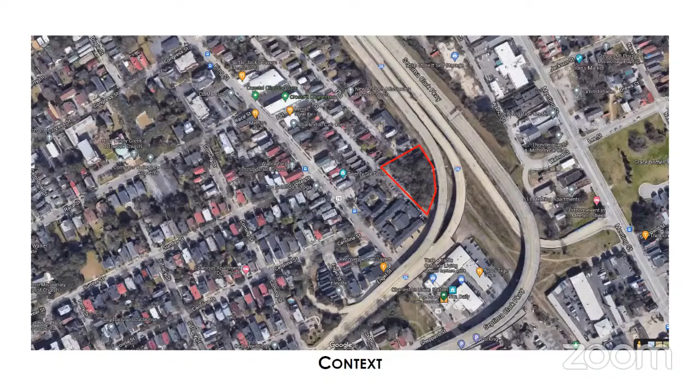Good afternoon. My name is Brian Fessler with McMillan Pazdan Smith Architecture. Also have Robinson Villa here with NEG. He is the developer of the project as well. So we presented this project about a month ago to the board, and we received some comments that we feel like we've addressed, and we're going to kind of walk through those. I think it'll take a little bit more time than normal. I could request a 5-minute extension. Sure, 15 minutes total.

So the primary comments we got last time related to the appropriateness of the building, the character, the sameness of some of the other similar buildings, and most prominently was the relationship of the cornice as it's visible from the elevated height. So those are the things we're going to primarily focus in on today, since I think this board has seen the project before. But if there's questions on any other items, we can certainly answer them.

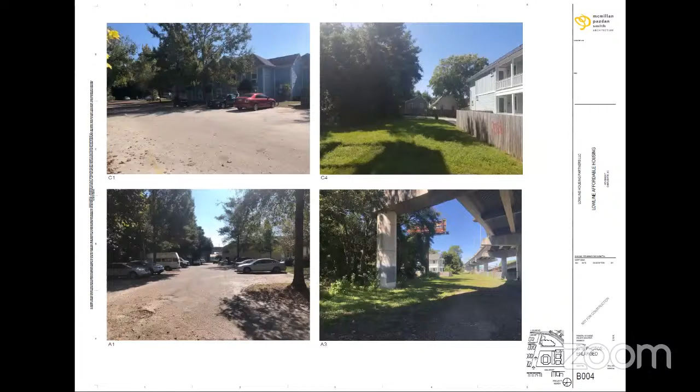So next, please. I want to fast forward through some of these early site plan photos and just move to the site plan quickly. So as a reminder, it's 100% affordable housing. It's a mix of 1-bedroom, 2-bedroom, 3-bedroom studio apartments behind the housing authority's property, but there are a few improvements on the housing authority's property as well as in the DOT property under the fence. In that area, we presented our design intent, but understand that property is primarily under a DRC. But we certainly welcome the comments this board has. Next, please.

Back up one more quick one. So, recent buildings that are relatively close by to this project in the city of Charleston are presented on this page here. They're comparable in terms of their height. They're all about 5 stories, similar to this building. The reason we bring these up is there were comments at the last meeting about our building having a similar effect or similar design to some of these, and that our site and our particular building needs to be more prominent, as some of the board members have said, that they view this site as a gateway to the city.

So with that, these buildings are all fine buildings. Ours, I think, in some ways, is a little bit more interesting in the fact that we really break down the massing a little bit more in terms of planes, and that's a revision from the last time, a little bit more planar on some of the brick components. And then also, these buildings are primarily viewed as one mass. There's some trickery involved with the upper story, cornices, caps, things like that. But I think our building's a little bit different in the massing.

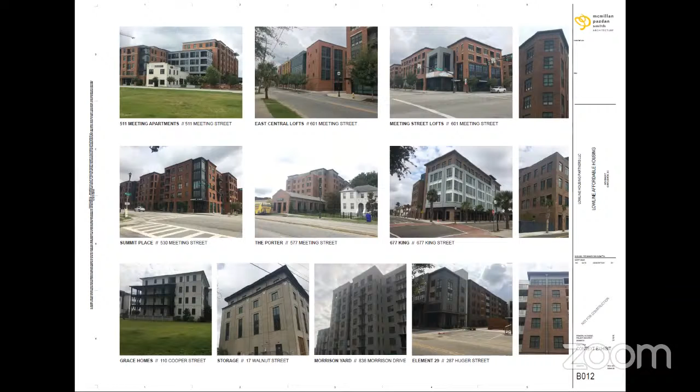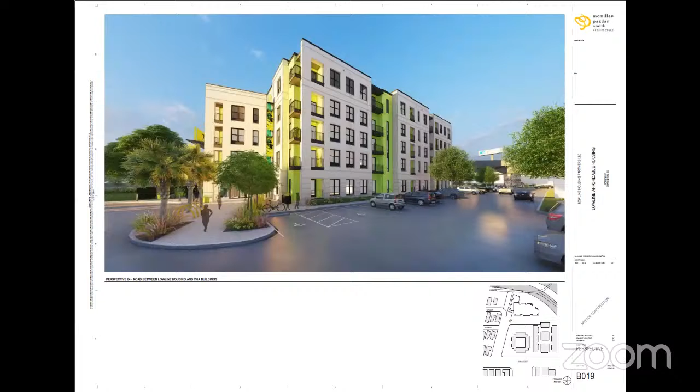View of the ground. We made a good effort to really engage the public at the ground, atypical from your normal apartment buildings. Everyone at the ground level has a porch to enter. Next, please. View from the courtyard area. You can see a little bit a glimpse of the street art. Next, please. Another view from the Low Line. Next, please. Another view from the Low Line.

So one of the other comments we got at the previous board meeting was that our design for our building kind of bled into the branding of how the Low Line park system is being developed. This time we're showing a clear intent that they're supposed to be complementary, but they're going to be different color palettes, different styles, so that the Low Line park has its own identity that's complemented by our project. Next, please. View of the entry. Next, please. Another approach view. Next, please. You can see the Low Line park system entry columns with our building in the background.

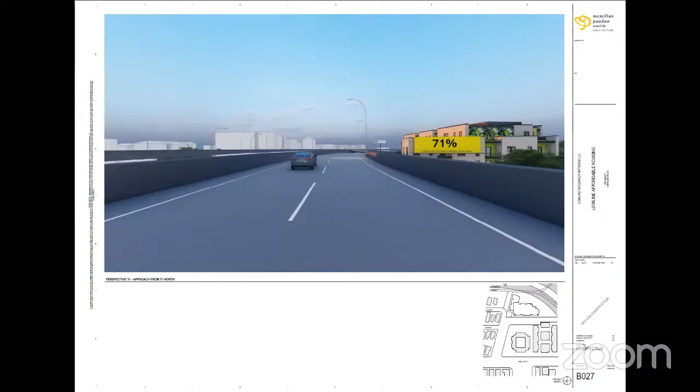Next, please. All right. So the primary discussion last time was how this building will read. The general impression of the comments we received was that it was favorable at the ground level. At the upper level, there was more concern. So that's where we're focusing. So this view here represents the first view you will see of this project as you enter the city. A good portion of it is obscured by a billboard that kind of commands your attention, and then the distant view of what's built now in Charleston, and there will be additional buildings built directly ahead of you as well.

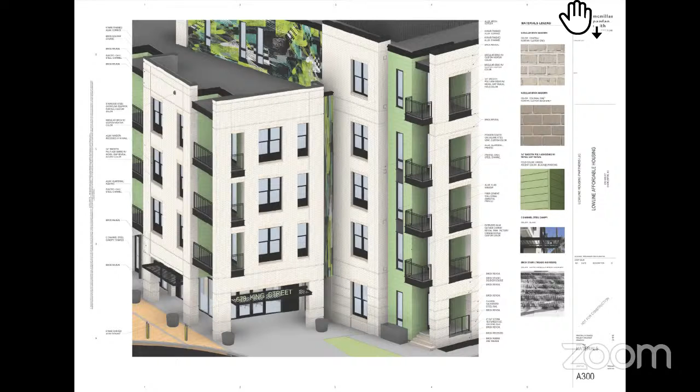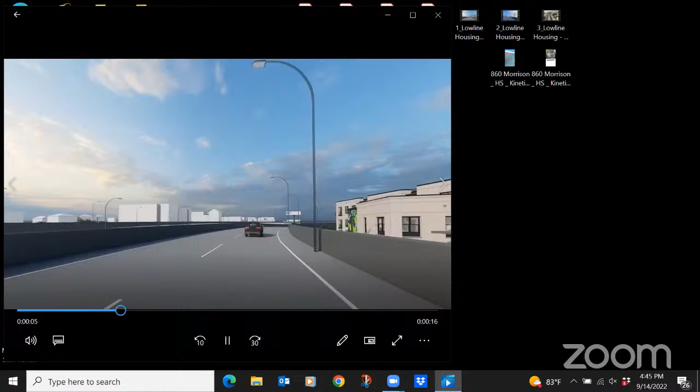So there'll be three animations. One is approaching the city, one is leaving the city, and one is more of flying above the road, which I know the board typically only wants to experience what you see at the ground, but to truly appreciate what the building looks like, the roadway, in my opinion, doesn't give you an accurate picture of this project. So this is approaching the city. Buildings on the right. Downtown's straight ahead.

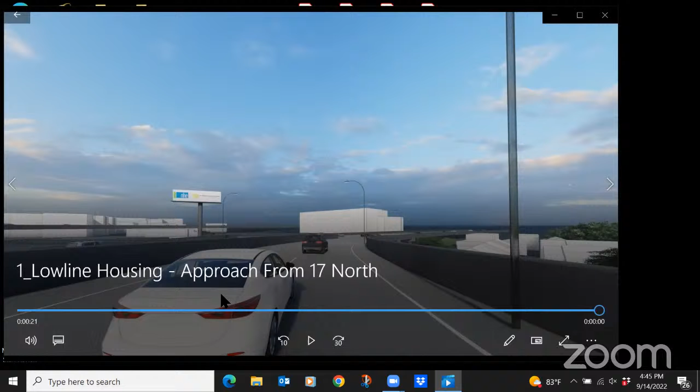I'll explain also the brick we're proposing, and the siding panels and colors are also down here. The primary field is the more rustic brick, and then the smoother one is only for the steps and brick sills. This is the view as you're heading north next to Charleston. The building is on the left.

And the third and final video is an elevated view, which isn't the perception the average person would see, but it makes it very clear to see the areas we've developed as street art, where the brick planes are, those components we talked about, the simplified cornice.

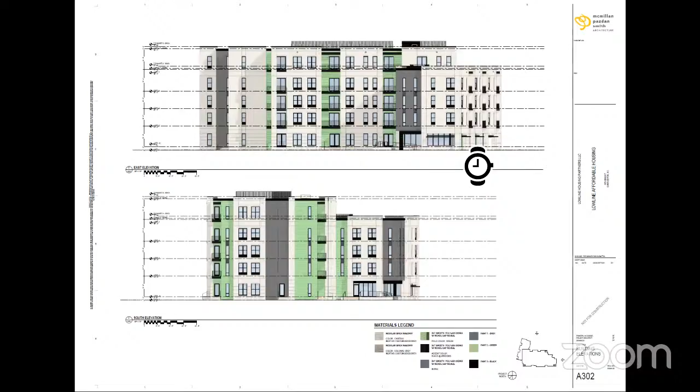Thank you, Ms. Minigan. Further public comment on this agenda item? No, city staff. Oh, sorry. So I always struggle whether I'm the public because I'm city as well. So anyway, good afternoon. I'm Geona Shaw Johnson. I'm the director for the city's Department of Housing and Community Development. Thank you all for your service.

We appreciate all the work that NHE and their team have done to answer the questions and the challenges that you all posed to them relative to the design of this project. We ask your support of it. I recognize that you all don't think about cost, nor do you think about low-income housing tax credits and all that go in to make these deals feasible.

But I would just admonish you to give us a decision of yes tonight so that we can move this forward successfully. We are all aware of the challenges related to affordable housing in our community. This will help answer that question, and we thank you for all that you do. Thank you, Ms. Johnson. Further public comment on this agenda item? Going once? Hearing none. City staff.

Some staff comments. Number one, recent revisions include a lowering of and a simplification of the detailing of the parapets, resolving with something cleaner and more in tune with the overall design language. Related to some prior board perspective of the proposed building as a gateway building, especially from the elevated highway, the project will certainly occupy a unique location.

However, the newly provided perspectives indicate the building to be more of a peripheral building. In this position, the many planes, edges, steps, and interactions on the proposed will provide a frontage that is both interesting and respectful of this unique location. Two brick colors are proposed with elements such as the window sills and headers utilizing the darker brick. I think I've got that right. Staff is neutral with no concern on either color, but not overly supportive of two brick colors for the building.

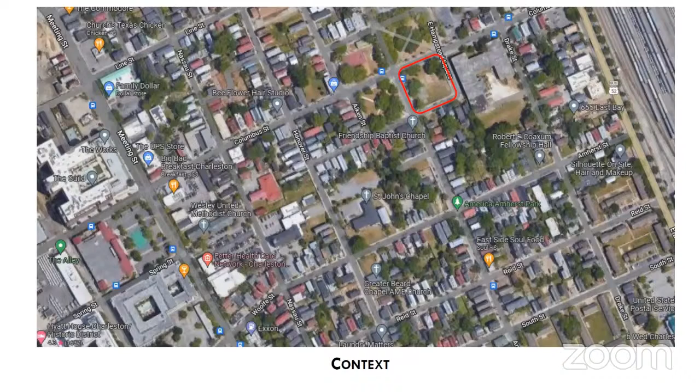All right, agenda item number 3 is Hampstead Mall Southeast Park renovation. This one is on the east side neighborhood in the Old City District, requesting conceptual approval for the renovation of an existing park to include an outdoor classroom with landscaping, hardscape improvements, and the installation of new perimeter fence and pedestrian gates. We have some context slides showing you the location via an aerial. Existing, there is a chain link fence on the property.

We'll have the applicant go. Thanks.

Good evening, Board. I'm Jeff Borowy, the Chief Operating Officer for Charleston County School District. I'd like to open by respectfully requesting an additional 2 minutes so we can show you a video. Certainly. With me today is DJ Helms. He is our project manager on this project with Studio Architects, and he's going to actually present the project. I just wanted to present a quick overview.

We do own the property. We have a joint use agreement with the City of Charleston for public use. That was one of the desires that we received during our public meetings. We've had 2 public meetings with the East Side neighborhood, and that would allow public use after school hours. So we would unlock 2 of the gates and allow public to use that. And that would really be beneficial during the holidays of the school breaks.

Our school, Early College High School, has an agreement with Trident Tech. We're on that campus across the street. We use this area for PE, and as mentioned, we will use it for an outdoor classroom. We are going to be building a support facility on the old Wilmot Fraser campus. So essentially, the quad will be between those two buildings. With that, I'd ask DJ to come up here to present our project. If you're done, take us to the next slide, please.

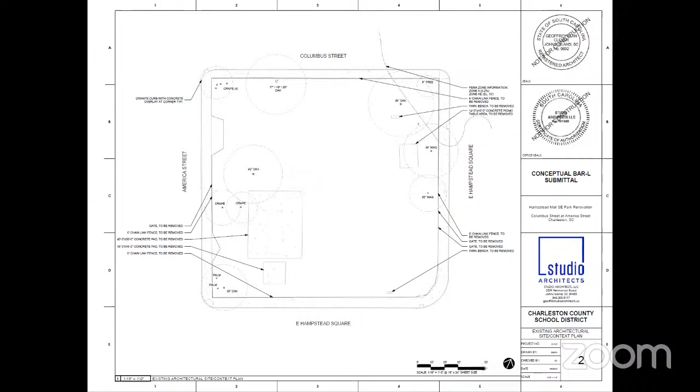Perfect. Okay, so this is the existing site plan. What you can see here is that existing perimeter fence is a chain link fence. We are proposing removing that chain link fence. You'll also see these existing concrete slabs that are located throughout the site. We'll propose removing those as well as the bench seating that's there, or picnic table seating you'll see in some images that we have later on at the site. Next slide, please.

We wanted to give some context to our site and the surrounding quadrants of the park. So we're going to go through northwest and then all the way across to northeast. So this is northwest. What I'd like to call your attention to here is the wrought iron fencing, as well as the low wall along the perimeter, as well as the signage here in the bottom right-hand photo. Next slide, please. This is the northeast quadrant. What we'd like to call your attention to again is that perimeter fence that's a wrought iron fence, as well as that low wall, as well as the brick edging on the concrete walkways. Next slide, please.

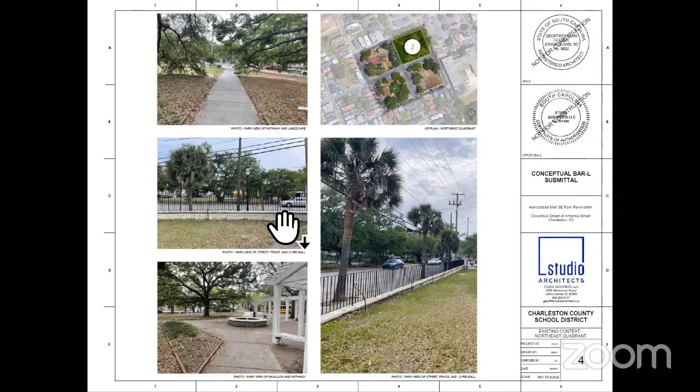Again, here we'd like to call your attention to the brick edging along the walkways, the hardscape and landscape, the trash cans. And this is the southwest quadrant. The next slide, please. It is our site, the southeast quadrant. And what you're going to see here again is those picnic tables and bench seating, as well as that perimeter chain link fence. And you're getting a glimpse of some of the concrete pads that are out there. Next slide, please.

Okay, so this is the proposed architectural site plan. The first thing I'd like to call your attention to is that multi-purpose playing field that's located on the south side of the site, as well as the outdoor classroom. The outdoor classroom would consist of some seat walls that would be brick, and we have some examples of those later on in the project. And then, of course, how those sidewalks organically make their way to the corners to provide access and kind of connect this quadrant of the park to the other quadrants, as well as to the schools across the street and to the corner of the street.

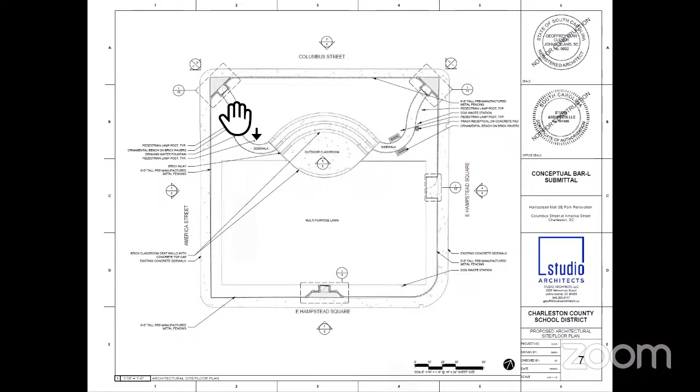We also are providing an entry point at the south side of the site, and we'll show you a little bit larger detail later on what those look like. We'd also like to call your attention to the bench seating, the lighting, and trash cans, dog waste stations, and drinking fountains scattered throughout the walkways. Next slide, please. These are some elevations of the site.

They're just a little difficult to read on the screen now, but what you can see is the relationship of the entryways to the perimeter fence, as well as the lighting inside and that low seat wall at the classroom, and how that all connects together. So we'll show you that in a little bit more detail and where they are throughout the site on the landscape plan in a couple of slides.

Next slide, please. This is an enlarged plan and elevation of one of the entry points. All the entry points pay tribute to what is across the street on the north quadrants of the park, using those cast-in-place concrete piers, which have a facade on them that matches the ones on the north quadrant, stucco and painted to match, and we'll show you that material in another slide going forward. We are proposing using wrought iron fencing in between the piers, and outside the piers a pre-manufactured fence. And all of these again relate to what is already there on the other quadrants, as well as that signage piece that we have as a placard on the entry point.

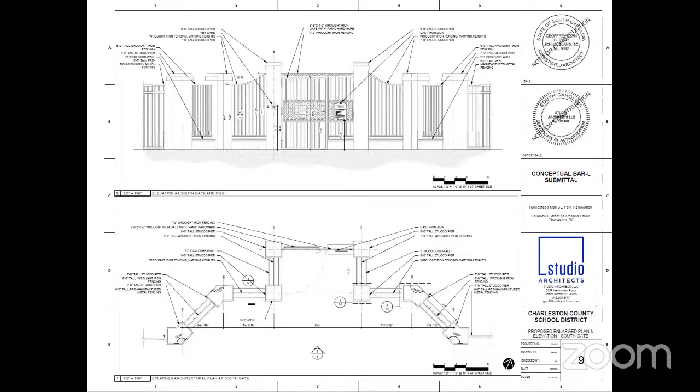Okay, next slide. And again, same thing here. The first one was the northwest side. This is the northeast side, so it is basically a mirror image of what you just saw. And then the next one will be slightly different. So if we could go next slide, please. This is that south entry gate that is slightly different, but still very similar to the other corners. And then next slide.

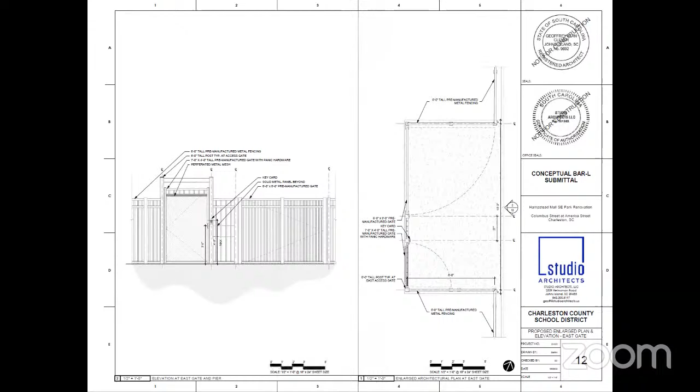This is an access gate. We're proposing using it primarily for the early college across the street, as well as for landscaping, utilizing the larger gate on the right-hand side here for equipment to maintain the lawns. Okay, next slide, please. This is just a little bit more detail of those piers, both in plan and in section, how those would be constructed and how they would be finished. Again, the finish on those, we'll show you in the next slide, would be to match what is across the street with a stucco finish and color to match. So we can go to the next.

So this is a detail of the seat wall at the outdoor classroom. We're proposing a brick finish on that with a concrete top. We'll leave some open spots in that seat wall for drainage. Next slide, please. These are the finishes. Again, that wrought iron black fencing on the inside of the piers, the outside of the piers would be the pre-manufactured fencing, and then the stucco and the color of the stucco.

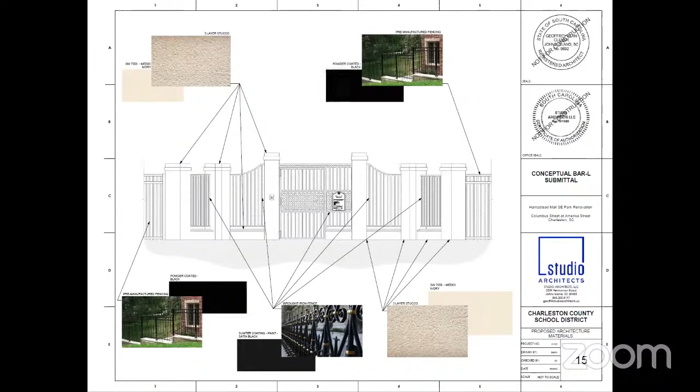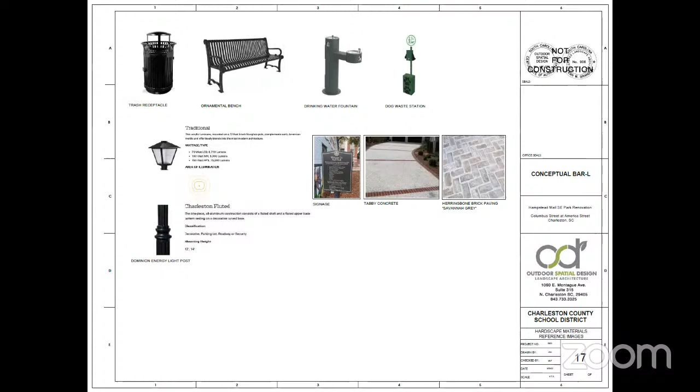The next slide. This is the landscape plan. It shows you a lot more of where that multi-purpose play field is underneath the foliage that exists today, those tree canopies, and how all of the things we've explained on previous slides would work with what is existing today. Next slide, please. And then these are some of the interior components of the park: the brick edging, the signage, the trash cans, water fountain, dog station, lighting, light posts, things of that nature. Next one. And these three slides are some stills of the entry points we just referenced, the stucco piers with the cast iron and perimeter fencing.

Next one. That's the last one. So if we have that video, it would be perfect. Don't have one? Okay, we sent over a link with it. You've done a great job with the presentation. If we don't have it, I don't think it's hurting. Okay, well, thank you so much for your time. Absolutely.

Public comment that's been submitted in advance has been considered and is written in reduced form. Any members of the public care to speak on this agenda item? Hearing none, city staff comments or recommendations. Okay, we have a few comments here.

Number one, staff understands the need to secure this area to be used by the adjacent school for a certain period of time during the day, and that agreements are in place to regulate when the park is open to the public. Two, the zoning division has no issues with the heights and location of the fencing and piers. Three, while curbing consistently around the project would be consistent with the northern quadrants, the fencing is an upgrade from the chain link fencing that exists there now. The pre-manufactured fencing, piers, and curb wall should match the existing at the northern quadrants of the mall as closely as possible. Four, omit the knee wall adjacent to the gate between the two entry piers in order to maintain the symmetry that was created with the piers and fencing at these locations.

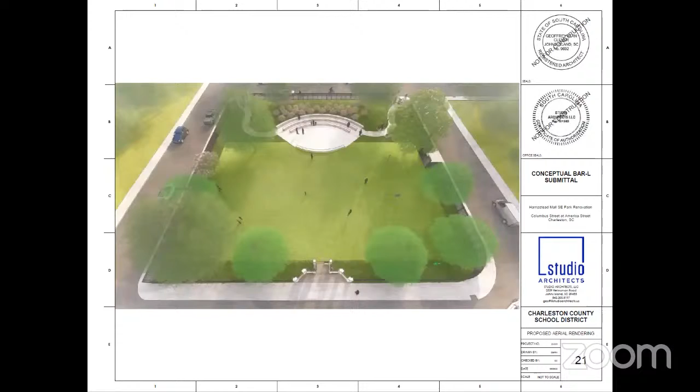Further questions or discussion? My only question is, it is a partnership. I understand that. I am a little concerned that it is fully fenced in. It's not entirely engaging with the neighborhood, and if it is a public park to be used outside of class time, then the public may not necessarily feel comfortable in going in. But that doesn't really relate to the architecture or anything.

What I've also noticed is that there's only 3 entry points. Is that right? There's 4 if you count the access point, and all of the entry access points have emergency egress to meet code. I know that the school district or the city or someone's going to want to use this park, and they're going to want to bring in food trucks or something like that. So I'm thinking about the accessibility of the park generally for a larger event or what have you.

I would just offer that the maintenance gate would allow larger equipment to get into that park, so we could get things in there. The second thing is that we did in our public meetings explain exactly the way it was going to look, and there wasn't any pushback from anybody on that accessibility to get in and out of there. It was a very positive meeting we had in July actually, in which they were excited about the use of the park after hours. So we didn't get any of that negative feedback.

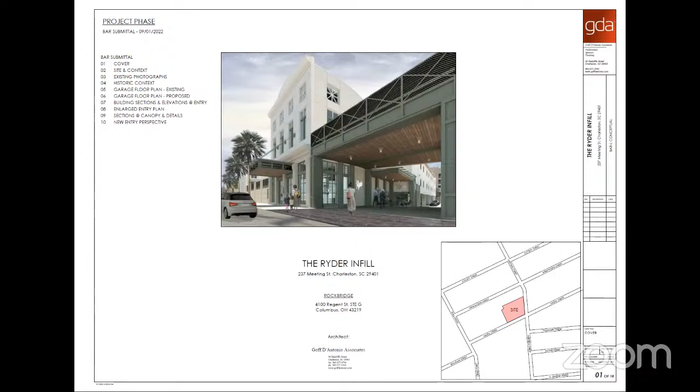So if you could go through the next couple pages here. Yes, the existing photos page, go to the previous ones, please. This just shows you the color palette, the stained wood roof, the light fixtures, the existing overhang down the garage. Next slide, please.

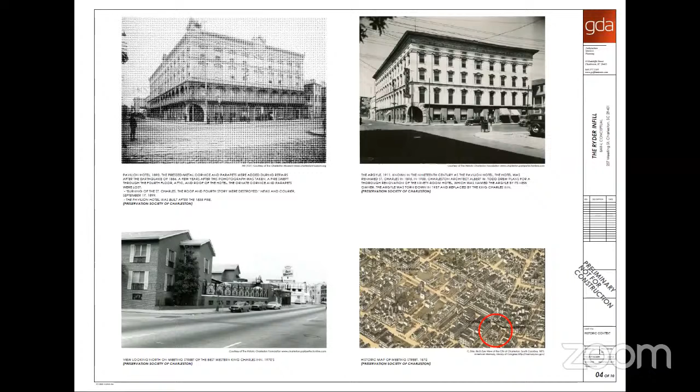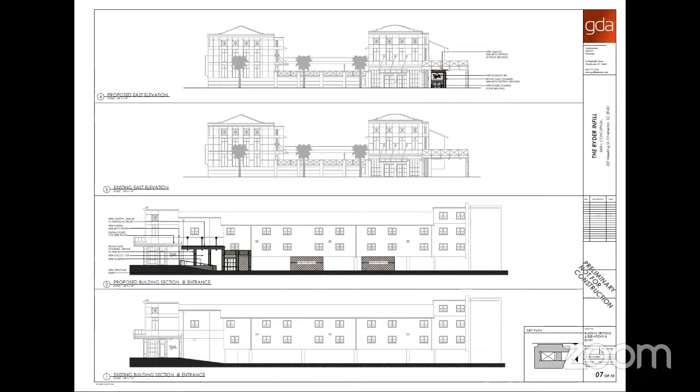This is the elevation sections of the new canopy that we're proposing, and ideally it's going to match the existing canopy on Meeting Street. We want it to be the same feel, same color, same tie-back rods, just good protection as you walk down to that lower level lobby. And then introduce new pilasters to match the existing design with the same color palette. Next slide, please.

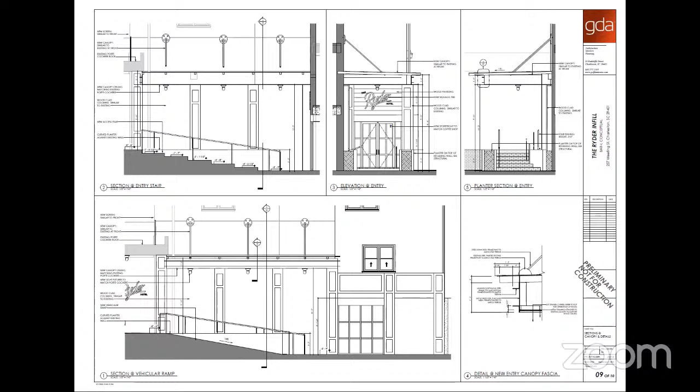Public comment on this agenda item. Take your city staff comments and recommendations. Number one, the project was initially approved with a provision for the green walls without the wire lattice. A sidewalk encroachment easement will be required for these, and they should be irrigated to be successful. Two, applicant is confident that queuing of vehicles caused by valet parking can be worked out with the city's traffic and transportation department, a critical next step.

Zoning division has no issue with what is proposed, and there is no TRC review required due to the small size of the addition. We understand this has been resolved. And three, the new lobby situated behind the porte-cochère and significantly lower than the current entry will have a minimal impact on the street presence of the project. Therefore, the recommendation is final approval with board and staff comments, with final review by staff of the forthcoming drawings. Any response, Mr. Batchelder?

Board comments and a vote on this agenda item. I agree with staff's recommendation. Have a motion? I'll introduce a motion for final approval with board and staff comments and a final review by staff for forthcoming drawings. Thank you. That's straight off the slide, so I'm not going to restate. Is there a second? Second. All right. I'll go down the roll. Mr. Brown, how do you vote? In favor. Mr. Metters? Yea. Ms. Sobel? Mr. White? Yea, in favor. And myself, yea in favor. Thank you to the applicant.

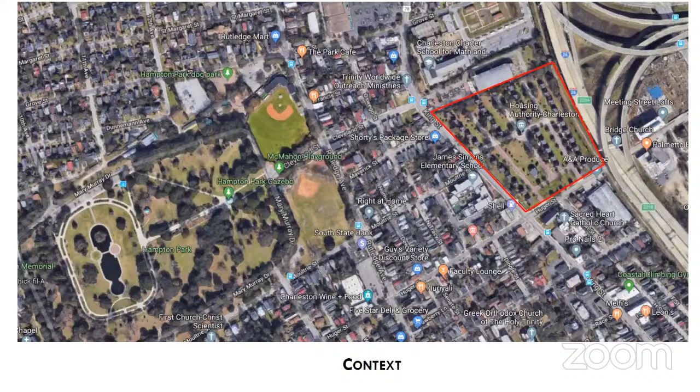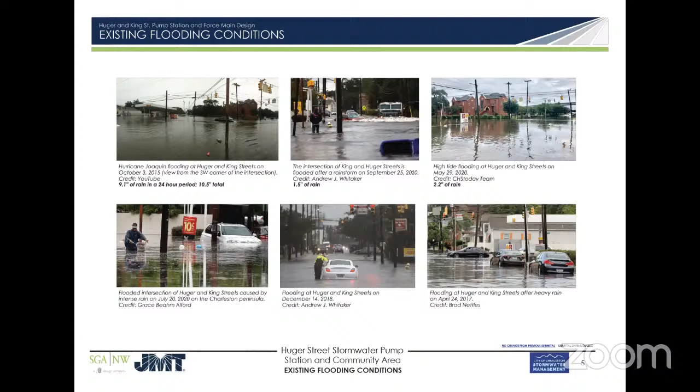We already presented this back in March, I believe, and since then there was a lot of development of engineering, progressing of design, et cetera. I think everybody on the board was present at that conceptual review, so I don't want to concentrate on every single drawing here, but go through some of the comments we had and how we approached resolutions of those. So pretty much the first 15 pages show context, some of our maps, history of the area, the engineering concept for the drainage solution for the area. So we can go through those very quickly.

The next one, I'd like to look at page 15. Number 15. So with that one, on the left-hand side, we looked at the comments from staff and board, and we have the responses to them. Some of the comments were more observations, so they would not even require responses. And for most of them, if you look at the drawings and images, you will see what we have done to reflect solutions to the comments.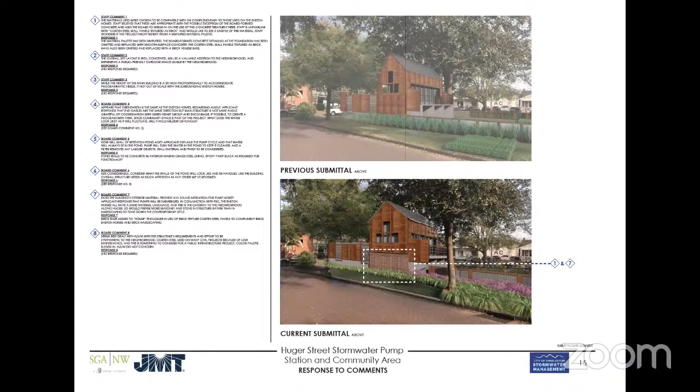So if we look at drawings 16 to 27, the line drawings of floor plans, elevations, 3D images, basically showing what we had presented previously and what we're presenting today with the development of this project. So again, let's go to page 16.

That's a plan, and I will walk you through what has actually changed there. With the developing of engineering, what we call this vertical structure house, actually housing the large electrical parts, which grew in size, also needed some other components like HVAC, condenser, and things like that. So our enclosure has been elongated a little bit, and on this Huger Street side, it basically got a little bit larger on this side, and it's hiding the condensers behind it.

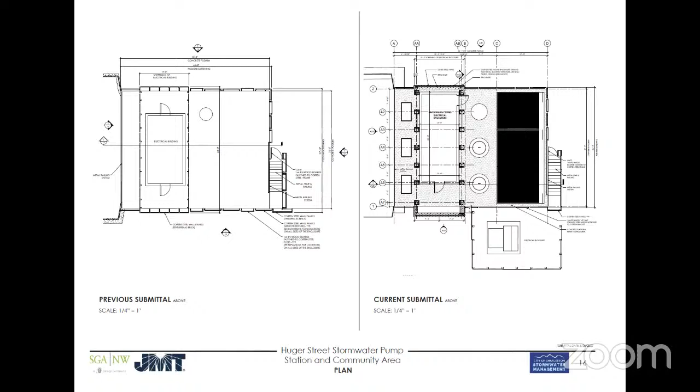Also, we had not had any information about the transformer and its size at that time, a few months ago. So now we know the size, we know where it can be located, and so this new plan shows the enclosure of the transformer, which is really high, taking into account that it has to be elevated and so on as well. So you will see on the elevations this enclosure is actually a continuation and extension of the enclosure of the platform which we proposed earlier. So again, page 18.

So you can see that's a Huger Street elevation. We show the previous rendered image and line drawing elevation, and the current image and line drawing elevation. One of the comments was to see if we can engage more of the brick veneers in this enclosure. So that's what is done now. You can see the base for the tiles is actually raised, and the tall brick, and it has three sides to it. The brick will match the color of the bricks in the existing historic buildings, but also a little bit of the details of projections and step brick and things like that.

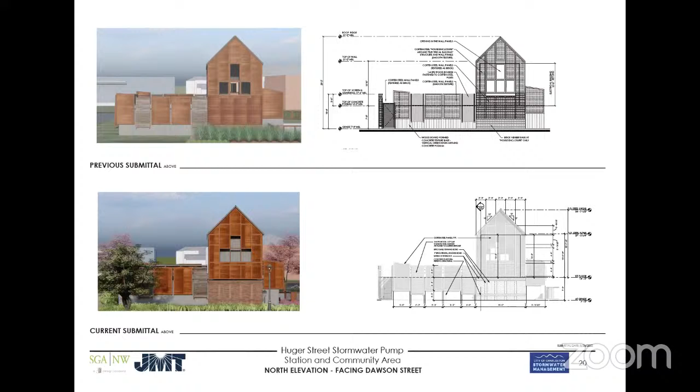So same, page 20, it's on the other side. It's the same issue. Here it's not as projected as much, but we're still engaging more brick at the base. Page 21. Here we were talking about what was the grade and the pond walls and what the color is and how it will be stained or not. Right now, on the renderings, it's still a gray concrete color, but what is proposed is to use the black epoxy paint, and all the walls of the pond will be painted that way.

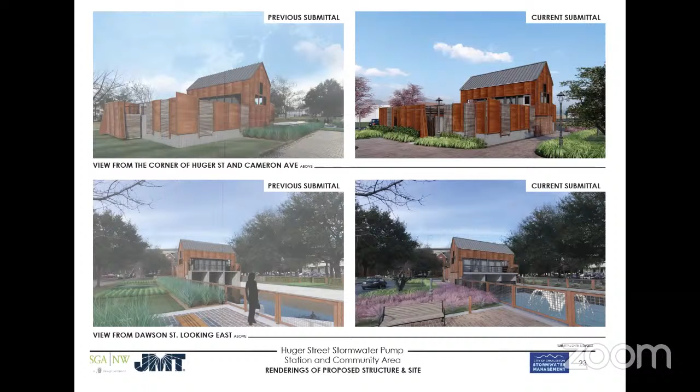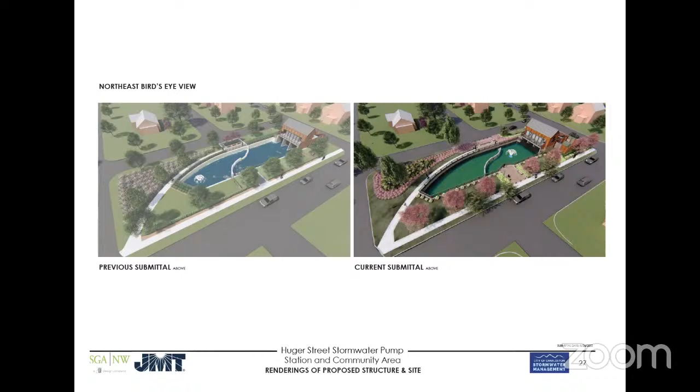And now we go through, trying to speed this up a little bit. Again, sheets 16 through 27, we can go pretty quickly. Again, we're showing on the left-hand side what we presented earlier, on the right-hand side what we developed. If we can keep going to, say, 23. So that's basically a few views of what we're proposing now, the newest views. And 27. Again, those are two comparison aerial images of the overall project, and you can see again the pond increase.

You can see how the landscaping has been developed, and if you go to page 29, it's really showing how picturesque this community area became. A lot of really social landscaping, acceptable forms, accessible areas for people to gather there, and all the landscaping has specifically been worked through with the owners and DRC involvement. So all the species of the planting and trees are shown here accurately, what the colors will be and things like that. So all other renderings actually present this.

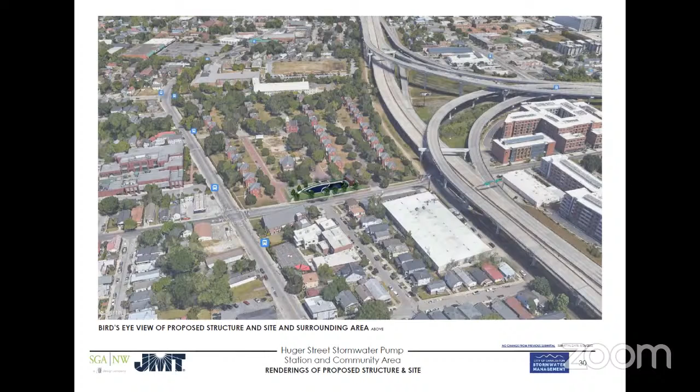And the rest of the pages are pretty much to support where we're coming from for the materials which we've chosen. They contain steel mainly for the enclosure, concrete, but also since we actually applied for final review here, we wanted to include some of the engineering drawings. They're very extensive. There are a lot of drawings, so we just picked a few of them for you to see how this project is developing, but not to review all of them. So at this point, I think that's what I want to say about this project, and we will be open to any questions.

Thank you. Mr. Chairman, can I ask a couple of questions? So you mentioned, and I may have misunderstood, that the brick color of the new construction would be close to matching the brick color on the buildings there. I don't know that that's necessary. The way I look at it, it could be distinctively different, but I appreciate that. Second, this building and its function is basically the same as the building down on Concord Street and the building between the two Ashley River bridges, in terms of its form and function, it's basically the same thing.

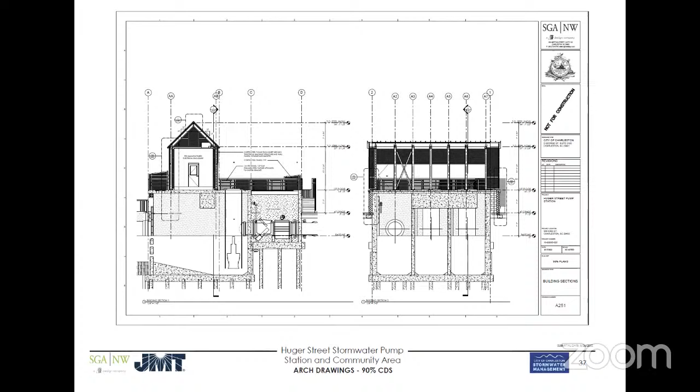We jumped off track. City staff comments or recommendations. I'm sorry, is there any public comment on this item? Oh, yes, sir. Thank you.

My name is James Ward, and I just had a comment based on my role as a teacher at College of Charleston. Given the emphasis put on the aesthetics of this building, I really am blown away by it. I'm really happy about that. But it seems to me that we have an opportunity for public engagement and generating and keeping public support for this kind of massive project if we incorporated more public interpretive signage. I mention that not as a criticism, obviously, but just as a thought.

I've noticed in other cities where they've had this kind of low impact development, or even something as engineered as this, they reached out and tried to tell the public exactly what was happening instead of just making it pretty. I think that helps to engage the public, make them aware of where the money's going, and perhaps keep them committed to the process over a longer period of time. I'm hoping that is helpful. Thank you, Mr. Ward. I appreciate your comments, very thoughtful.

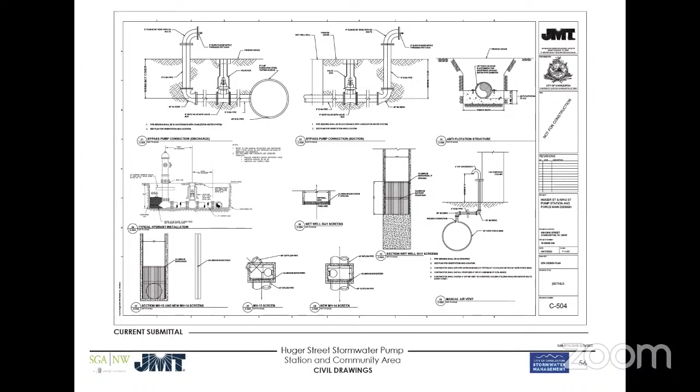Other public comment on this agenda item? City staff comments or recommendations? Number one, this interesting project marries the functions of a much-needed stormwater pump station with a public park. As a reminder from the conceptual review, the project will use different materials in a contemporary approach, while the color palette, scale, and massing of the primary structure will be compatible and sympathetic to the nearby historic Enston homes. Much of the housing for the sizable equipment will be below grade, resulting in a building height approximately the same as that of the Enston homes.

The project has continued to be refined, with revisions including an opening up of the plaza space on Huger Street, which will provide more space to access and use the park. The park area has gone through several iterations, resulting in a comfortable public space around a pond, which staff is assured will retain roughly the same level of water year-round. It is noted that the interior lining of the pond will be painted with black epoxy paint, although this is not reflected on the segments in the middle of the pond.

Staff is appreciative of the applicant's decision to replace the brick texture panels with real brick and to replace the board form concrete with a smooth concrete. We do believe that the exterior concrete should be textured or finished in some manner. And four, noise mitigation has not been addressed outside of confirming the location of the pumps to be underground. The perceived need or lack of need for sound mitigation should be confirmed.

And lighted bollards, which normally are not acceptable, are likely appropriate here due to the public and institutional nature of the project. And last, number 6, applicant to provide photometric information for each type of fixture, as well as site photometric data. We are recommending final approval with board and staff comments with a final review by staff of permit drawings. Any rebuttal or reply from the applicant?

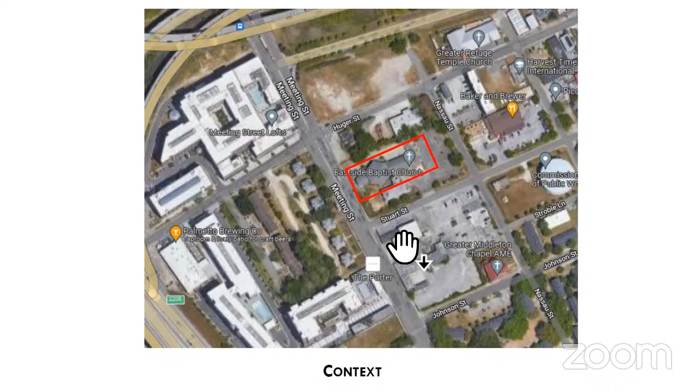We took our time from preliminary to come back to final, because there were some details that Bill will further enumerate that we wanted to get just right, because it's a complex building, but we have experience doing this type of project, and it's developer and architecture intensive supervision. And while it's a complex building, we know how to do it and have the right people to carry it off. So again, it's a privilege to present for final approval. Let me introduce the lead architect of the project, Bill Morrison.

Thank you, Jeffrey. I have a set of drawings here that's way too long and probably too boring. So if I give you the page number, can you go to that? Okay. This is my first time presenting for final, so if I skip over anything, I'm happy to answer any questions. But what I'd like to do is focus on the three principal materials that make up the building. So if you wouldn't mind going to page 28, I'd like to focus on these wall sections, which I think outline how the building comes together.

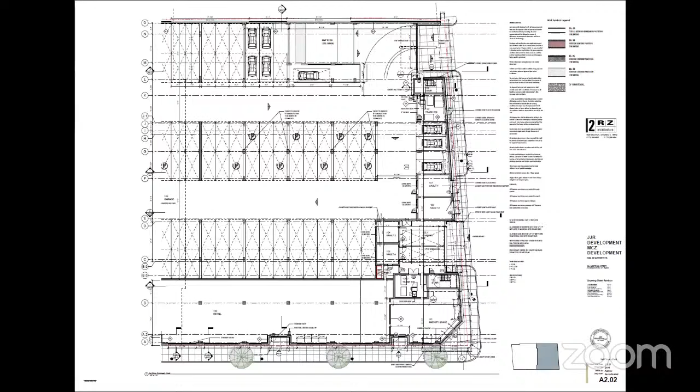I don't have page numbers. No, if you can just go to the 28th page, if that helps. Well, we have a bunch of drawings assembled together from different projects. So if you have the actual A2 sheet, that would probably be more helpful. Oh, really? Yeah. Sorry. It's all right. So if we could start at A5.00. I told you these were boring. Yeah, right there's great.

So as we're getting there, the three principal materials really are the base, which is made up of brick. Brick is pretty straightforward. I think the most interesting thing about the brick is the rustication. We're alternating every fourth course. We're going to pull the brick out 3/4 of an inch. The brick scale is a Norman sized brick, velour cut. So I think the Norman scale is a little bit more in keeping with the size of the building itself, but it'll give it a little bit more weight.

It's Acme brick. The color is slate gray, so it's a little brown grayish brick, not unlike what the renderings show. And then again, I'm sure you recall the middle portion of this is clad in a metal standing seam panel. I think some of the comments from prelim were the concern for us to watch for the quality level of the metal itself. We've had a number of discussions with the manufacturer. We're doing a standing seam panel. It's a 0.032 mil thickness, 16th inch wide batten.

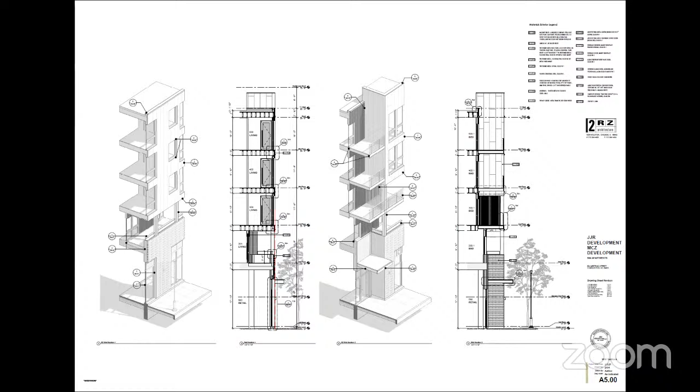But the most important material is this porcelain. And I can tell you it's a lot easier just to say, let's put porcelain on the building, and then you actually have to figure out how to do it. It's a little tricky. Our main goal here was that the porcelain panels be a large format. We did a lot of studies of smaller format panels. And while we really wanted a large format panel because of the size of the building, having the fasteners hidden was also very important. And what we found is that the bigger the panel got, the more the manufacturer wanted us to expose fasteners.

So we have a product now. It's by Cosentino, a very large company. The material's out of Spain, but it's backed onto an NFPA 285 rated panel. It's basically an insulated panel, and it's fused directly to the panel, and then the profile itself is a lot like a tongue and groove. So what you're really doing is just taking a stainless steel screw through the tongue and screwing it into the substrate. So our thinking here is that it's a pretty easy installation, which means that the success rate is just that much higher.

The joints will be open, but they're thin. They're 1/16 of an inch wide. I think we have a board here; the panel is a light beige, and the backing is white. So I think the joint itself is going to be fairly hidden. But we're able to maintain a 22-inch wide by 120-inch panel, which is still decent. It's about as big as we need to get it.

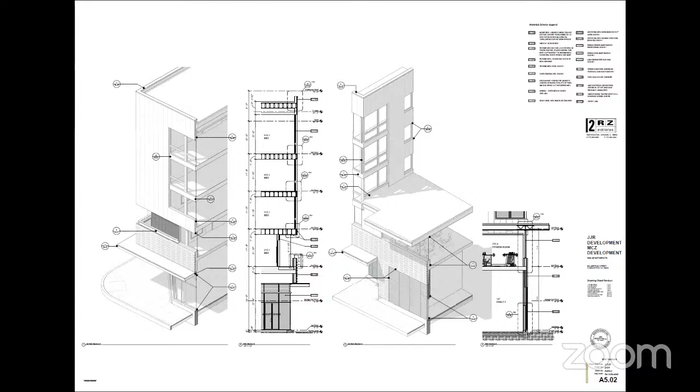Right here you kind of see the corner of the building at Nassau and Stuart. This is the entrance at the amenity space. But here you can kind of see the transition from brick to metal to the porcelain panel. And I think it might be hard to see on the screen there, but you can also see the panel side itself. Next slide.

The entry to the garage. This is the Huger side of the building. Very similar in nature, but where these are enclosed on Stuart, they're open on Huger. Clad in the same material though.

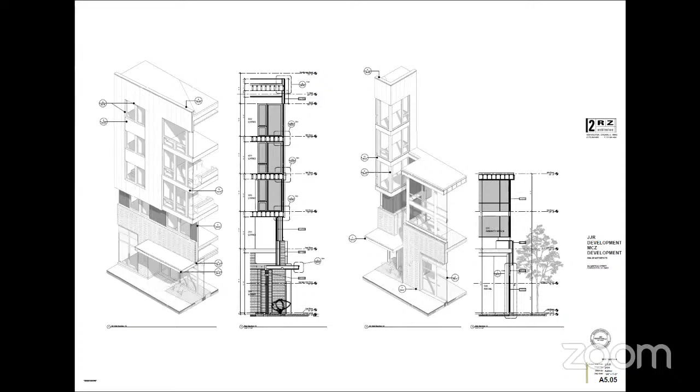So, like I said, I'm happy to answer any questions, or if I missed anything, I'm happy to go back if you need. For a first time at final, you handled it the right way. You zoned in on the concerns and comments that have been brought to you before. I know Mr. Metters in particular will be mollified by all your attention to these material details. He's very often interested in those.

I was up all night worrying about this. Well, that's good. That's the right answer.

Let's see. Is there any public comment on this agenda item from anyone on the floor? Hearing none, city staff comments. Number one, design has continued down a very similar path as before, but comparison drawings as noted in the submittal requirements would be beneficial and necessary for any additional reviews.

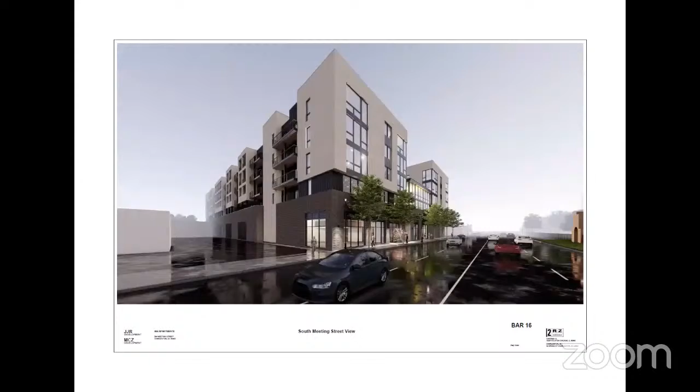Two, the clear distinction between a strong base, a somewhat truncated middle of a different material and color, and a strong top are an interesting abstraction of the traditional layering on this decidedly contemporary building. Three, the materials and detailing are consistent with what the board has been led to expect with a relatively simple palette, with enough variation in the materials, colors, and textures to make it visually interesting.

Four, as a consistent staff concern, metal flashing should be minimized, have thin edges, and have ends placed vertically on the surface behind them and held as tightly as possible, also creating a drip edge. And five, the board should really weigh in on any super unique conditions which they need to see in the mock-up panel. And we're recommending final approval with board and staff revisions.

Very good. Thank you, Ms. Parrish. Any response from the applicant? Okay. Board discussion and a vote on this item. I appreciate the attention to detail. It's funny, it's actually kind of an old school final submittal where it's all black and white. It's just technical, and that's fine. That's actually exactly what we're looking for. And I appreciate the way the material investigations have wrapped themselves. I do too. I'm sorry.

I said black and white because we didn't have any architectural issues previously as well. That's right. And obviously, the onus is on the applicant to make these materials work. The fact that they are manufactured, as Mr. White frequently comments, this day and age is probably a good thing, so you don't have to worry about on-site quality control conditions. Just everyone else, we forewarned about it. Make it work and let staff know early if there are problems. And all done in Spain, right? Right, all manufactured in Spain.

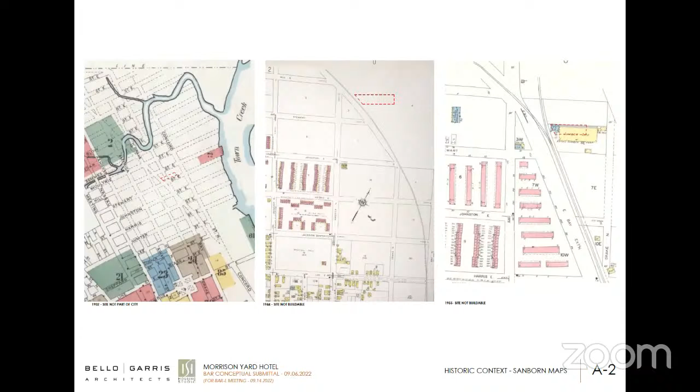I'm Eddie Bello with Bello Garris Architects. This is a little unusual in that we have two different projects, the hotel and then the next agenda item, multifamily, on one site. So I wanted to introduce how we thought about the site. We spent a lot of time as a project team thinking about how the overall site development is organized. Lawrence, if you could go to the next slide. I'll try to go quick. We'll skip over this because the Sanborn Maps show no historic fabric up here.

Thinking about the site, a couple of things stand out: the elevated highway to Mount Pleasant, the 17 bridge is there. Just to the north of our site is the Charleston Water System property. That has a main on it, meaning nothing can ever be built there. We're going to use it for parking, and we'll come back later to show how that'll be screened. The key takeaway is that it'll always be open. Then the two sites: the hotel site here, which my partner will talk about, and the big wraparound site for the multifamily. Next one, please.

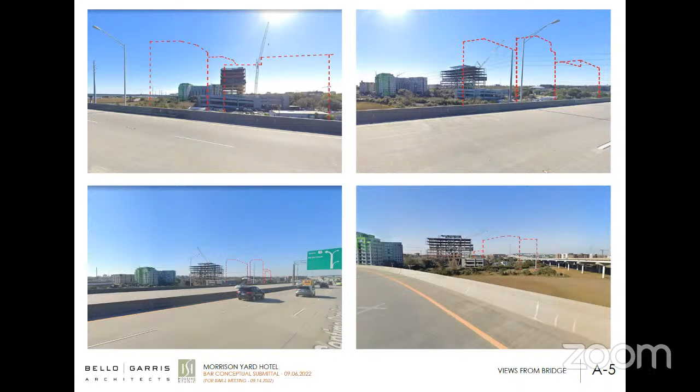This is just another view. One of the things we did consider, next slide, Lawrence, is the perception of this project from the highway. We thought about that a lot. It's a big project, and we did not want one big mass. We were very deliberate about breaking this up into several volumes because we were very conscious of the streetscape and the skyline. This is the last thing you'll see as you head over to Mount Pleasant, and as you come into Charleston it's one of the first things you'll see. You'll be looking over 6 lanes, but you'll still see it, and we consider that a good thing.

Next slide. The main thing to us is what you see and experience from the street. There's not a lot of context up there. There's not any historic fabric. There's not much street grid. It's slowly being built with its first 2 phases. So a lot of what we focused on was driven by what has most recently been built. The earlier phase is a very large, dynamic office building just to the south.

Next slide. And then there's a very dense multifamily project. Those are coming along nicely; they're almost finished. As the last component of this, we wanted to step down the intensity and not have it feel too much. One of the key things was keeping the buildings broken up. Next slide. Again, across the street, low scale, non-historic.

Industrial building soon to be gone. Next slide. Okay, so this streetscape here shows the north side of Morrison. Again, the earlier phases, and then you can see just sort of how we broke up this project into two separate volumes on the street, and then even more. We'll talk about this on the multifamily.

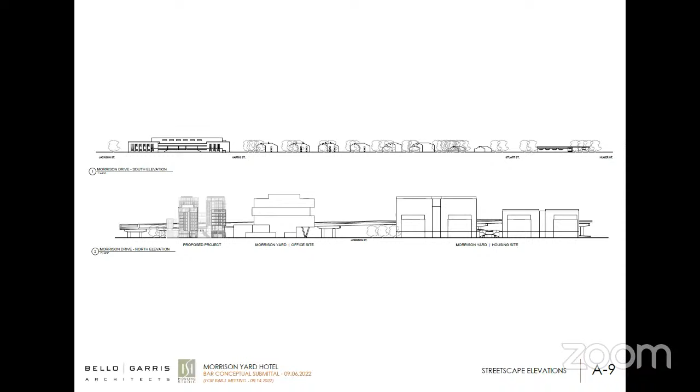So next slide. So if you think about how this project could be approached, and you guys see this a lot on these very dense projects, the zoning allows high density, you've got to have a lot of parking. So there's a lot of problems with that. There are lots of examples around the city. We'll have parking in the middle and the architecture around it, but you'll have this one long continuous building. It's very hard to mitigate in terms of proportion and lifting up the mass, all the things that the board asked for. So we didn't do any of that. We broke it up right away.

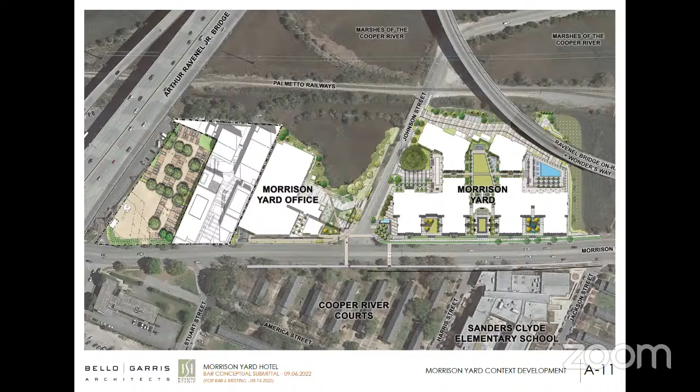So again, just to orient you, the hotel, the bridge up here. So what's fairly unique is we still have to have all the parking. But the parking is underneath what we have here, so raised here. So we've got this very wide open space, and landscape architects will explain, but it's almost like a people plaza more than cars. It's got really nice pavers and trees and benches and all those things. But it's a shared space for both buildings.

And then about 150 feet back is, instead of a big sheer wall, we have a stepped terrace that's planted and it's basically an open park, which you can see as a visual sort of terminus. And then above that is this raised open plaza, and again, all the way through. Steal Chuck's thunder, but the idea is this building is broken out as you look through it. So the thing I want to stress is we went to great lengths to not have a big mass facing the street. We turned the massing so that the majority of the weight of these buildings is back on the site. The narrow portions are on the street, which is much more interesting.

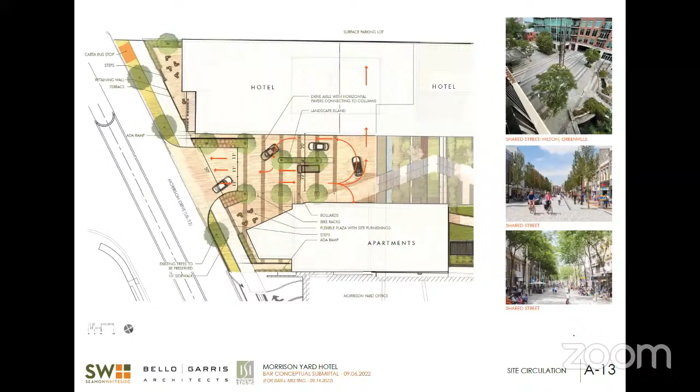I'm Eric Garris with Bello Garris Architects. I'm not sure if I need to ask for a time extension or not. At this point, you do. What do you need? 5 minutes? 10? 5 minutes. Okay. I think, Mr. Chairman, they should have coordinated that better. I didn't have a timer. Is there a clicker or do you do the clicker?

Okay. So I'll dovetail to what Eddie said, but thank you. I'm excited about this project. I'm excited, as Zach said in the beginning, to be part of the team. I grew up not far from here, spent my childhood coming to Charleston, live in Mount Pleasant, drive by this site every day. And I've seen the buildings on the other sides of Mount Pleasant that have been developed, and I've seen one other one that's been developed. It's the other gateway entry building in Charleston, and I feel like we can do better.

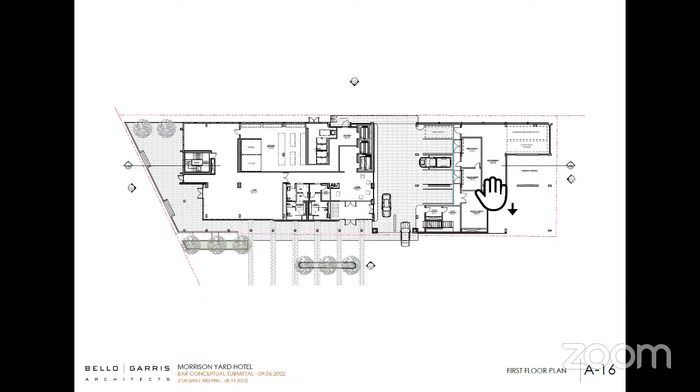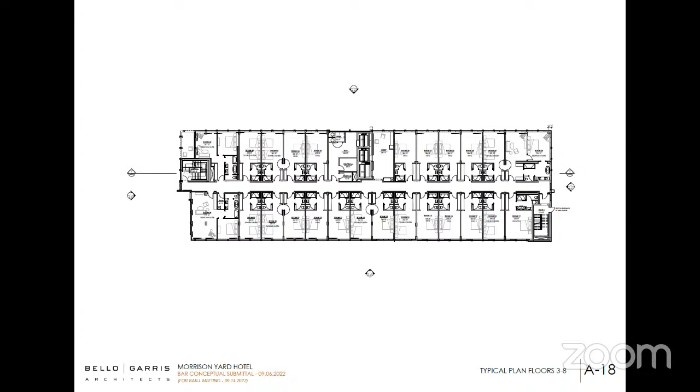Next slide. Levels 3 through 8 make up the balance of our guest rooms. Ultimately, as we move forward with the hotel brand throughout the development of the project, room mix might change slightly, but the room quantity and count will not, which won't affect our zoning submittal nor the parking requirements that we've been asked to meet and required to meet by prior approvals.

Next slide. And a roof plan, which obviously will screen mechanical units that are on the roof. We are proposing for them to be collected in an arrangement in the center of the building that will make them least visible from the street level.

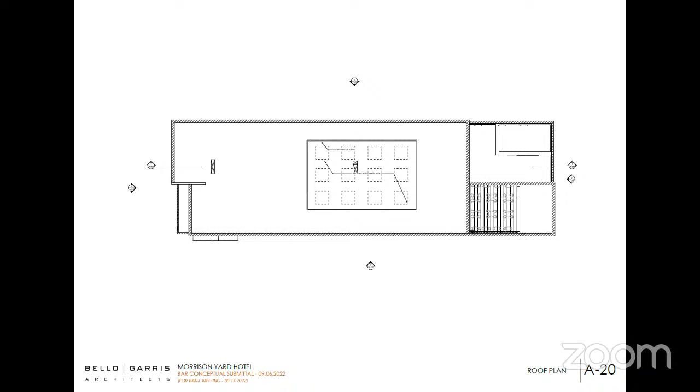So as you move around the building, we've tried to create a cohesive design that has relationship. So the east elevation relates to the west, the north relates to the south, the north relates to the west, so on and so forth. And there's always a memory in the building that you can find that kind of transitions in and around.

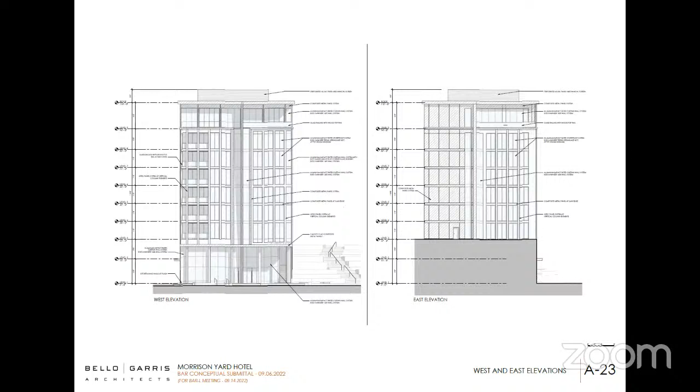And then we move into the elevations. And black and white line drawings aren't necessarily the best, but they do give a sense of what the building is. And as we looked at pushing the building back, we also looked at creating these two masses that are juxtaposed against themselves and slightly shifted to kind of create narrower frontages to the Morrison Drive and not have such a wider building, where it's harder to deal with proportions. So that really tends to start to reinforce the vertical elements and nature that the BAR principles asked for. Next slide.

The white that you see there is proposed to be a GFRC, fiber reinforced concrete material that would be smooth finish, and then metal panel at the slab edge covers that just kind of give an accent to the slab edges themselves. As you can tell, I'll gloss over more, but you can tell that we're bringing glass in and up and around and really trying to make that connected to the ground level, to the upper level, and then around the corner so that the building has kind of a dynamic flow about it.

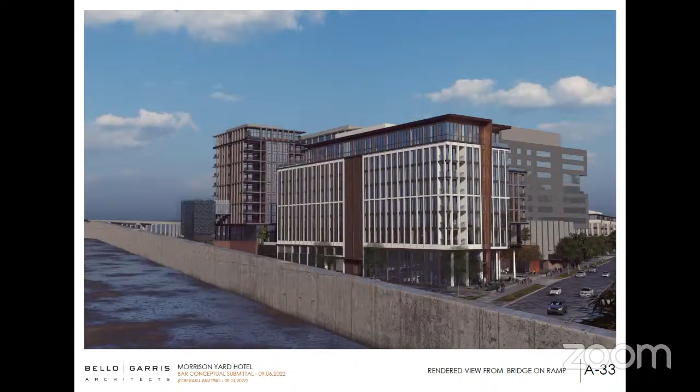This is a view as you're driving towards Mount Pleasant, right as you get on the Meeting Street ramp, looking north or southeast. Next slide. This is looking southwest from the north side of the Jersey barrier.

But then elsewhere, we're going back to those elements that are metal panel, GFRC, and those things that won't necessarily be available to touch by the occupant. Next slide. And then just a slide, which is always a nice shot. So anyway, thank you very much. Thank you.

Public comment on this agenda item. Mr. Schwebler. Good evening, I'm Justin Schwebler of the Historic Charleston Foundation. We'd first like to thank the applicants for taking the time to meet with us at several points over the last few months as this project has developed. And we'd also like to commend the team for taking comments from city staff and modifying the designs to try and accommodate their recommendations prior to this application.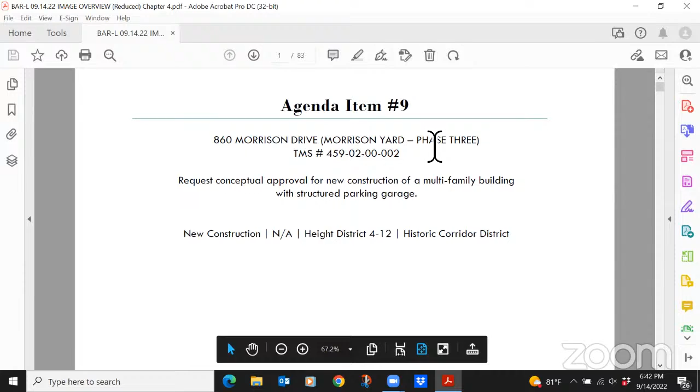It's off the record. Agenda item number 9, part and parcel of really agenda item number 8, 860 Morrison Drive, Morrison Yard, Phase 3, multifamily. So this is the, actually, we'll wait till the other. Yep, that's fine. Okay, this is the other portion of the project. This is the multifamily. Again, this is the construction, UP zoning, Historic Corridor District, and they are requesting conceptual approval for the construction of a multifamily building with structured parking and garage.

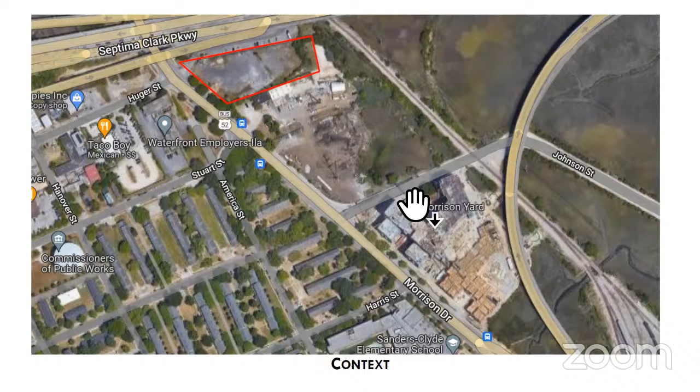Mr. Travis, can I kick this one off? Oh, right? Oh, we have some, I'm sorry. We have an error message and we have context. Lawrence can fix the error message, and then we'll let Tori walk us through the context slides, that you're going to be really familiar with now. Yeah. There we go. And this is the location, everyone. And we can fly through the context. There's the existing project to the south. There we go. Okay. Very good. Applicant has the floor.

Mr. Chair and Board, thank you so much for your time tonight. As Eric said, we're really excited about this project. And Tori and Lawrence, I'm going to thank you for the amount of time that you've spent with us to date, because obviously we feel like it's been very successful working with you and the various stakeholders that we've been talking to and being informed by. I'm Chuck Travis. I'm the principal of the Housing Studio. This is Alberto Ceballos, who is also going to be participating in this presentation.

We quickly want to introduce our design team. Rick Kamakaris is our project architect that's going to be working on this and also worked on Morrison Yard Phase 1. We have two folks from Seamon Whiteside, Malcolm Glenn, who's our civil engineer, and then Katie Sailors, who you have already seen some of her work, landscape architect of this project. Extremely talented folks, and I'm very fortunate to have the opportunity to work with them. Lawrence, we're going to try to make this fairly succinct.

If you'll move to the diagram that shows the zoning map. Not so much that I want to talk about the zoning. No, go back one, please. Because you already know that we're in the UP. Because I really want to talk as a designer more about context and what informs us as the designer. And I know we talked about the built environment, what's next to us, and essentially what's still in the process of being built. But equally as important, if not more so, which we haven't really spent a lot of time talking about, is our connection to the river.

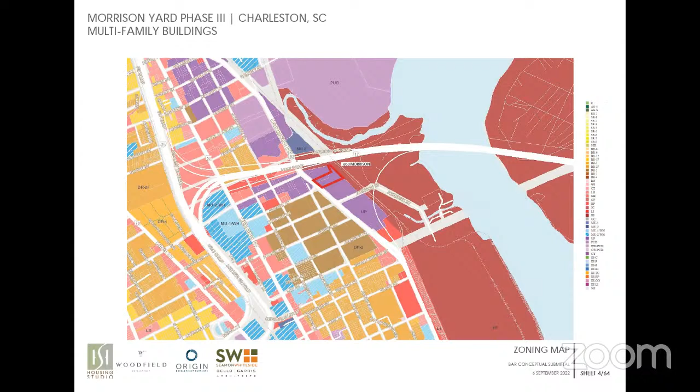I'm looking for the height that Eddie showed earlier. That one. Just that you see our built environment. Obviously, you know Morrison Yard, phase 1, that's under construction. That building at its highest point is about 122 feet. The office building under construction is 166. The height of our project will be somewhere in the neighborhood of 148 feet. We'll continue forward, please.

And you know, you've heard we've gone through various charrette processes. If you just keep moving once. What I'm looking for now, thank you, right there, is to talk about our parti, which is what we spent an enormous amount of time on. And this really represents the key components that I think have driven the design of this entire project.

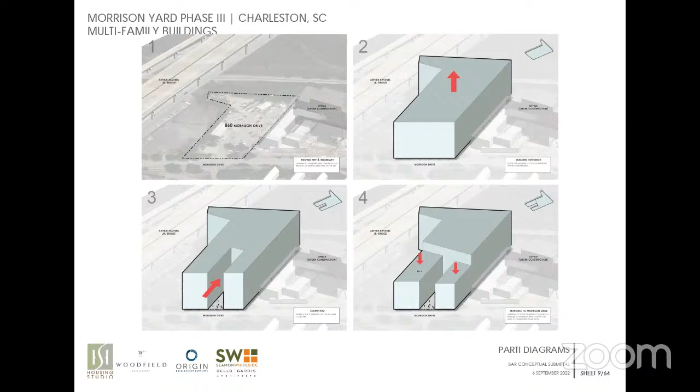If you look at our site, you know exactly where it is, and you know that if you get the additional UP points, which we are going to be doing, Charleston rises, and we will be having workforce housing, among other things that we'll be doing, that represents a mass that's 12 stories in height. If you start looking through the diagrams, you're going to see how we obviously thought of Morrison Drive as being extremely important, and also the scale of what's happening along Morrison Drive that starts to sculpt what this can become. Next slide, please.

And then going back to my conversation about the river and the connection to it, obviously it's views to the river, views through the buildings, and how we actually take these components and start breaking them down into the various stages that can work together, or various buildings that can work together. And perhaps one of the most significant moments that we had, because we had a conversation with Tori through email, was diagram number 7.

As you can see, the building, because the program used to be much larger. As you look at diagram number 8, we started to lose that wing, primarily because that wing represented more density, but it also blocked views from the crosstown corridor and to the river, and having that connection to the river, back to those folks that are driving on a daily basis and on an occasional basis from Charleston towards Mount Pleasant and vice versa.

We started to realize what a great opportunity we have and how we really have to respect it. And then to the point where we actually started even chamfering edges of buildings more to create more views and open up corridors, and really understanding how we're connecting not just from Morrison towards the river, but also in multiple directions. So go to the next slide, please. We'll just fast forward to the next diagram.

And what this diagram really represents is that there's various stages of height and density that we're dealing with. As you know, the retail that's adjacent to us, that's currently under construction at the office building, is somewhere around 2 stories in height. We have an element in our building that comes out to face the street that's 2 stories in height, which is about 25 feet. It steps to 7 stories, which then steps to 8 stories.

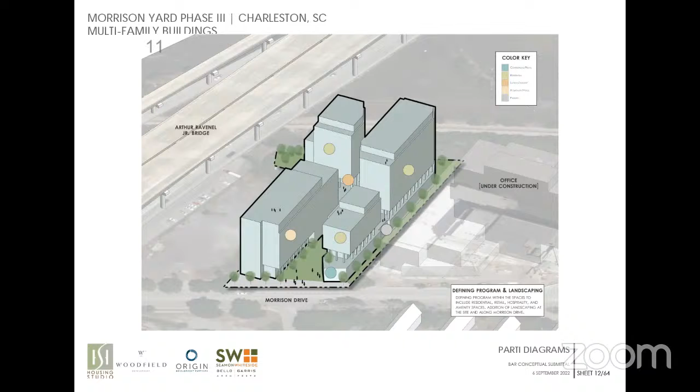And you can also see how we started working with the building mass itself to address the river and essentially have a gradation of scale and mass and just create a product and such. And we'll turn it over to Albert. So, Lawrence, could we show slide 42, please?

This is something that was really important to us, and it was creating a base that actually hid all the services, trash, moving, and services within the podium. And we wanted to create this pedestal element. And we got inspiration from the rampart walls that you see in Fort Moultrie and Fort Sumter, where you have this beautiful masonry wall that elevates an elevated terrace.

And you can see it here pretty well, how that base is really, our buildings are sitting delicately on top of that base. And that base peels off in relationship to Morrison Drive, and that's where we're going to have our boutique leasing place. And it's something that we really wanted to do too, to bring nature into these terraces. So every time we have a break between buildings, there is nature that rolls over into the space. In this case, in Morrison Drive, we have the terraces that roll down into the courtyard.

If you go to number 46 on this. And then the same thing applies to all the faces of the building. There's actually breaks into that modern rampart wall where we actually have green screens that break that and create really more of a vertical type aesthetic as it relates to the buildings above.

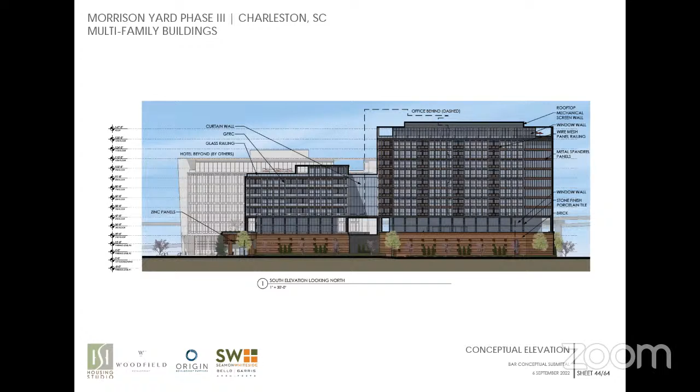And if you can go back to 44, you can just stop it there, that's fine.

So then you can start seeing how that rampart wall really relates and becomes a pedestal, a base to the buildings, and the relationship of the buildings that sit on top of that base delicately with these colonnades that wrap around the buildings, which act as a base of the buildings. Then you have the body of the building, and then the penthouse levels become the very top of the building, which is a modern interpretation of a classical building layout.

We really love to spend time in the space between the buildings because we think that that's the most important thing. And we really love the landscape that Katie and the team are starting to craft and design. So there's a lot of different little interesting connections between the buildings. There's bridges that do some really delicate things and connect the buildings. We needed a staircase, and you can see it there on the right side of the project to connect our project to the surface parking on the CWS side.

And because that was such an important architectural element of the building, we actually wanted to create something that was sculptural in nature. We worked with a kinetic artist, and we were inspired by the grasses and the marshes around, how the wind actually blew around the marshes. And I don't know if we can show the video of it.

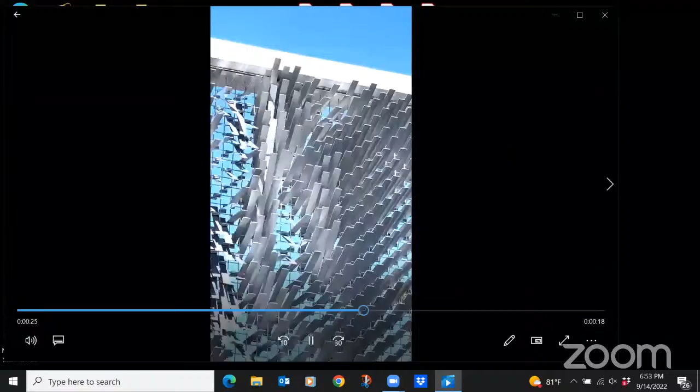So then the gardens, the green walls, the terraces, and the skins of the actual building really start becoming an extension of nature, an extension of the marshes, an extension of the banks of the river. We can go back to the renderings.

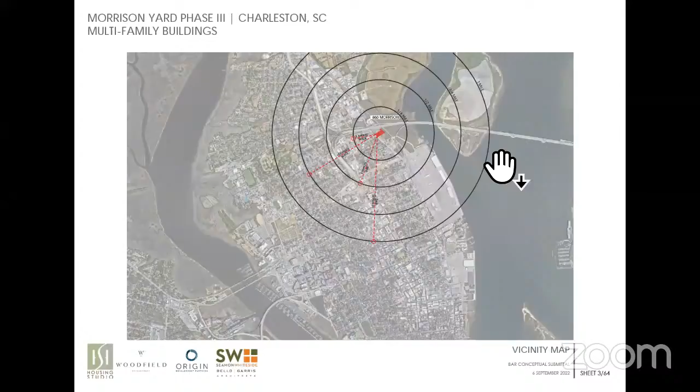So we have our landscape team and civil engineering team here if you have questions for them. Obviously our architectural team will want to answer anything you might have as well. Thank you for your time. Thank you. Public comment on this agenda item.

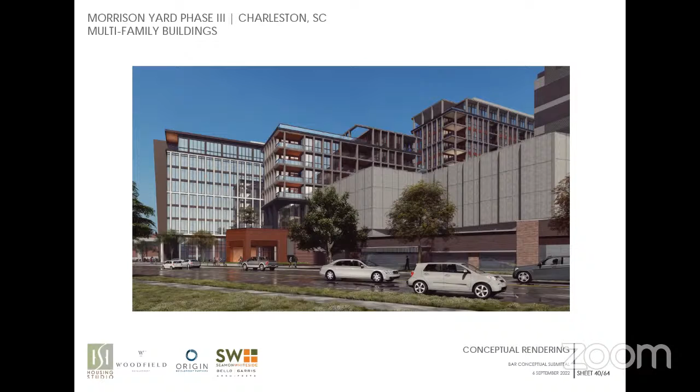Karen Lettigan with Preservation Society of Charleston. First, we would like to thank the applicant for meeting with us to discuss this project and being receptive to our comments. This is a significant gateway site, and we have learned lessons from recent development just to the south of Morrison Drive about how consequential decisions made in the design review process can be. It's critical to get this project right. While we are appreciative of efforts made by the applicant to reduce the scale of the project by breaking up the building into distinct masses, we feel the architecture needs significant restudy that warrants deferral.

The biggest issue is the lack of hierarchy in the facades and confusion of proportions. There should be better definition in the building's base, middle, and top. The horizontal elements should be de-emphasized to create better vertical proportions, and the number of facade expressions should be simplified as you move around the building. The building frame also feels very heavy, and there are too many uncomfortable voids. On a more specific note, the base of the building feels disjointed from the floors above, and there's too much separation created by the intermediate pedestal.

The top of the building similarly feels unrefined and needs significant development, especially since this will be a highly visible fixture of the skyline. On Morrison Drive, we do feel the one-story zinc-clad building has potential to be an interesting ground floor element, but it's currently underscaled and uninviting. The building frame should be lengthened and lightened, and more glazing should be incorporated. The brick wall that encircles much of the rest of the property and is most visible from the rear also feels very fortress-like and is incongruous with the character of the rest of the project. Other treatment options should be studied.

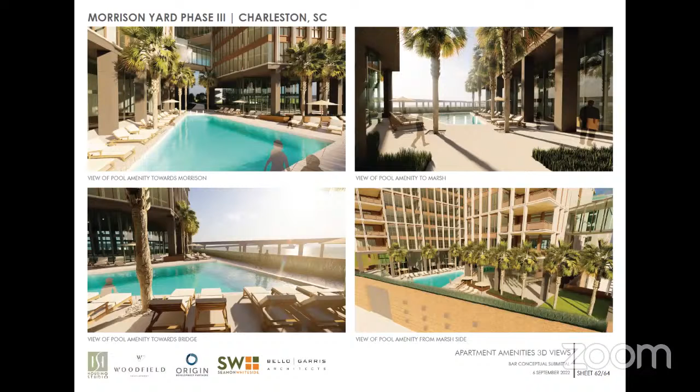One question for the applicant. The kinetic feature, the videos, were those of a mock-up specific to this project or just of a similar concept? They were specific to this project. We took a drone and sent the videos of the marshes. The kinetic artist in San Francisco created it. Okay, very good. You can see the drone shots as part of it. Yeah, okay. Further board comments? Is that all you have?

No, go ahead. No. Well, I would say that I think the parti, and I love it when folks use the word parti. That was like hammered in my brain at Auburn. And since there are no Auburn grads in Charleston, we don't hear that word.

But I know, but taking that mass and breaking it up as it is and connecting with bridges is truly very successful. And even the sort of massive masonry base that it all sits on, that doesn't bug me because it's going to be facing the river predominantly. Although I do really think that the middle and the top of the building just feel very heavy and dark to me.

And I think a lot of it has to do with some of the points that the Preservation Society made about that there's not the sort of, well, it would be pretty good with vertical proportions. It has a very distinct egg crate look to me right now. And I think that being so tall, at 148 feet, this is an opportunity to be very expressive with the top of the building. And those two things are critical to this.

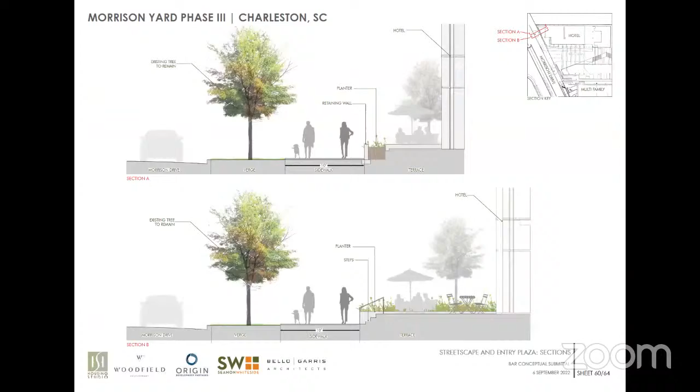All right, we have two policy agenda items for the board, which probably don't interest the general public, but if they do, you're more than welcome to stay. Unless you sell signs for a living. I believe we're going to take a brief... Yep. We're going to, at this time, the board will briefly, I hope, go into executive session related to these two policy items. And then, yes, ma'am, it's part of that. I'll do that before we go in. Only if we need to.

Okay. Actually, I take that back. We're going to take a brief break. And unless we have to go into executive session, we're going to proceed with our agenda. Please, everyone, take a 5-minute restroom break. So we're meeting here? Water break. Yes, ma'am. Okay. We'll come back here. And everyone, please remember, we're still on the record.